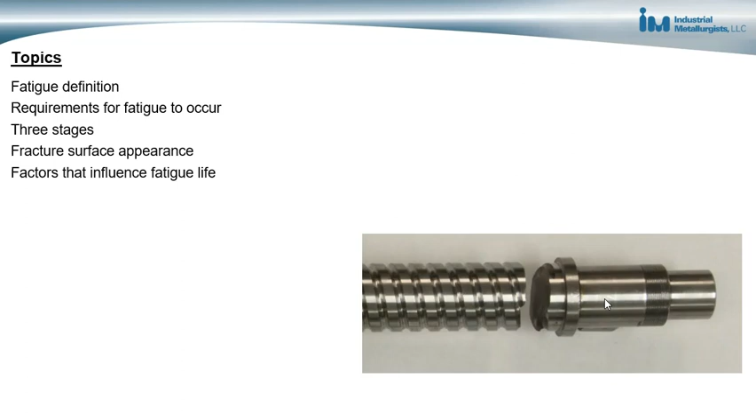So fatigue is the localized permanent damage to metals that are exposed to a cyclic stress. So cyclic stress is a stress that cycles between a high and a low stress repeatedly. Localized means that the damage is confined to a portion of a component or joint. So in the shaft that fractured here, we see that there's damage only to one portion of the shaft.

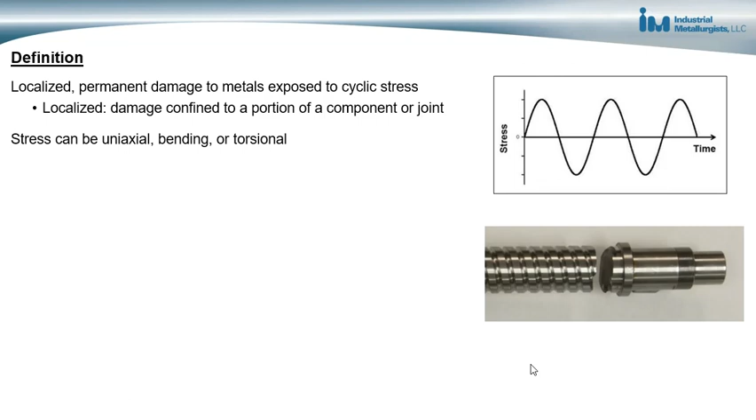The stress can be uniaxial, bending, or torsional. We'll discuss this in a later slide. Some portion of the stress has to be tensile in nature. So there must be a tensile stress in order for fatigue to occur. There are a variety of sources of the stress. It can be applied force, vibration, acceleration, and deceleration. All can be forces that can lead to the formation and growth of a fatigue crack.

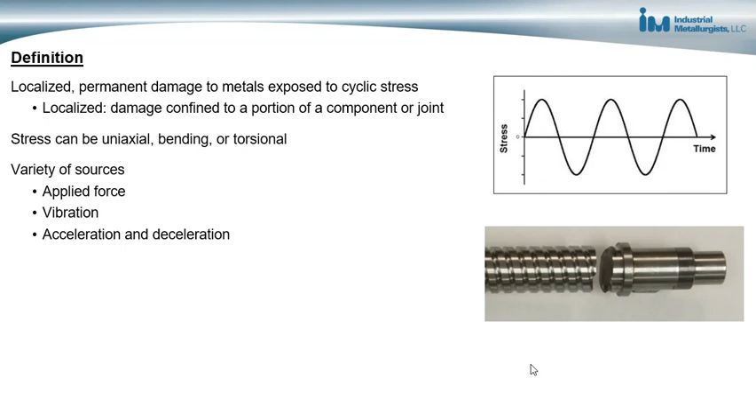There are three requirements for fatigue to occur. First, there has to be a cyclic stress. The stress must have at least a tensile component to it. So we can have fatigue due to tension, shear, as long as some part of that stress is tensile in nature, bending, and torsion. And finally, the local stress must exceed the metal's yield strength.

So what's important to understand about fatigue is that we have formation of a crack at a stress that's less than the metal's nominal yield strength. And what happens is that at the localized area, the stress on the metal exceeds the metal's yield strength, but the stress that's on the entire piece of metal does not exceed the metal's yield strength.

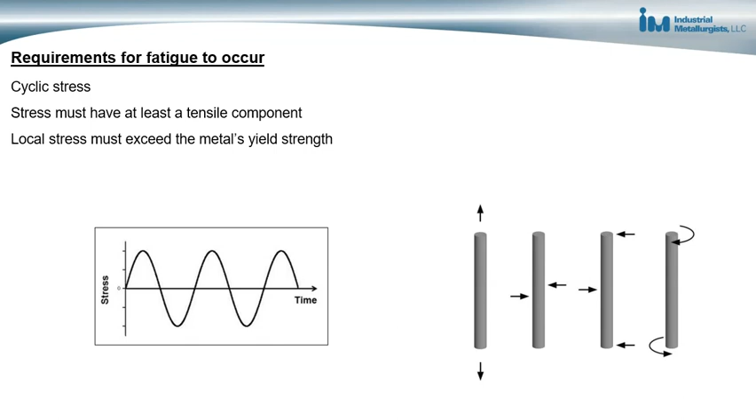So the stress is exceeding the yield strength at a localized spot in the metal. But we don't see any deformation of the metal because the overall stress on the metal is less than the nominal yield strength of the metal.

There are three stages of fatigue failure. The first is crack initiation. During this time, microcracks first form at the surface of the metal, and then the microcracks grow and coalesce to form larger cracks. After that, the next stage is crack growth, when the crack grows with each stress cycle. And finally, there's fracture. Fracture occurs when the cross-section of intact material is too small to support the applied load.

So crack initiation takes some time. The time it takes depends on the metal, on the strength of the metal. For some metals, it can be below 1 million cycles. For others, it can be above 1 million or above 10 million cycles. So it just depends on the metal and how strong the metal is.

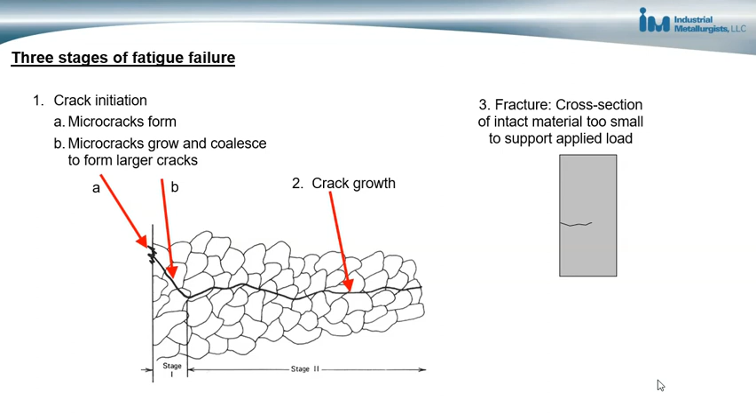Sometimes we can see features on the surface that's failed due to fatigue that indicate the origin of the crack, and it helps us understand that fatigue occurred. These are called beachmarks, and these are sometimes visible with the naked eye. So what happens is the crack forms and it grows, and then finally, when the remaining intact material doesn't have enough strength, the remaining intact material will fracture.

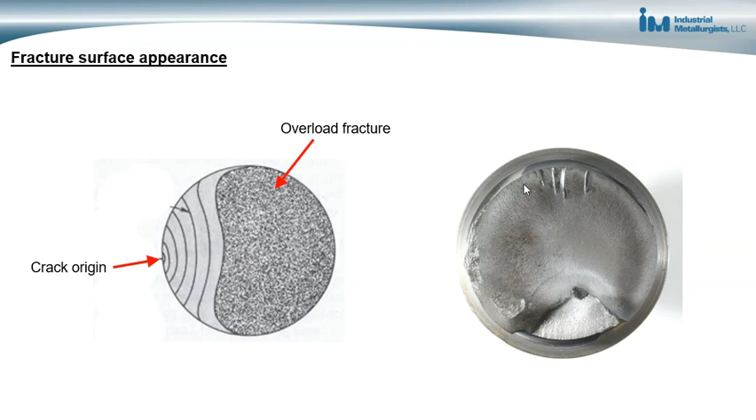There are a number of factors that influence the fatigue life of a component. First, there are mechanical design features that are stress concentrators: laser marks, notches, abrupt changes in cross section. These act as stress concentrators. Stress concentrators are features on a component that concentrate the stress, resulting in the local stress being higher than the nominal stress on the metal.

So with notches and laser marks and abrupt changes in cross section, we see that the stress at these locations is higher than the stress over the cross section of the material. The alloy strength also influences it. So for steels, as the strength gets higher, the number of cycles to failure increases, or the load that can be tolerated for a certain number of cycles to failure increases.

Non-metallic inclusions and manufacturing defects can also occur inside metals and also act as stress concentrators, resulting in the localized stress being higher than the nominal stress on the material. So inclusions in metals and manufacturing defects localize the stress within the metal. In steels, non-metallic inclusions include manganese sulfide inclusions, aluminum oxide particles or titanium nitride particles. And manufacturing defects might be laps, seams, and voids in a material.

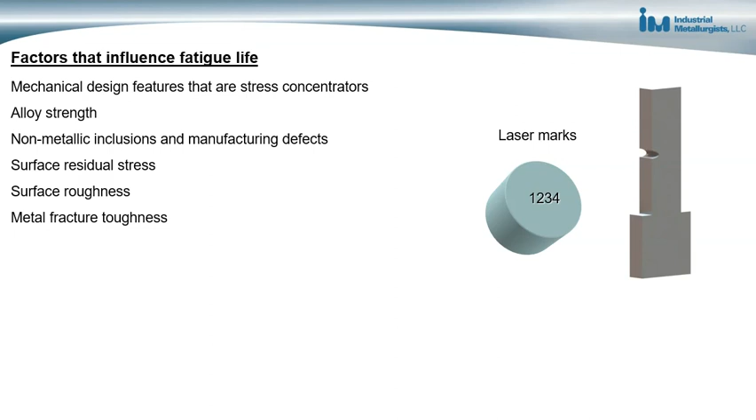So that's it for explaining fatigue, the requirements for fatigue to occur, the stages of fatigue cracking, and the factors that influence fatigue life.